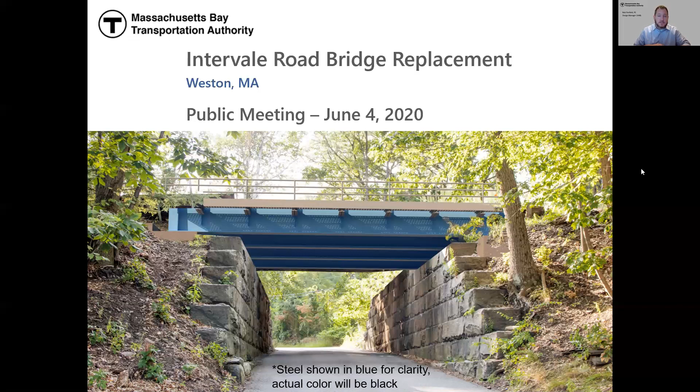Meeting with you today, as John mentioned, is the MBTA project manager Gary Orlando, who is the project manager with Barletta, myself, the design manager on the project, and Andrew Burkholder, who is our senior engineer on the project. Next slide.

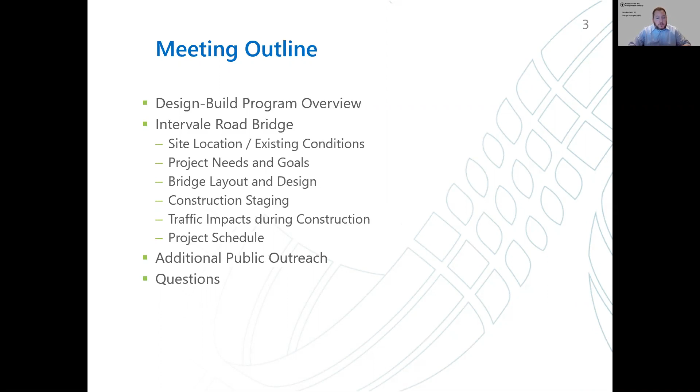As John indicated, the outline for today's meeting is as follows. We're going to discuss how this project fits into a larger design build program that the MBTA is delivering. Then we'll focus on the Intervale Road project itself, discussing its site location and some existing conditions, the project need and goals, the proposed bridge layout and design and detailing. Then we'll walk through the construction stages we'll use to build the bridge, and how traffic would be impacted during those phases. I'll highlight the schedule of the project and identify other opportunities for future public outreach, and then we'll move into the question and answer session. Next slide.

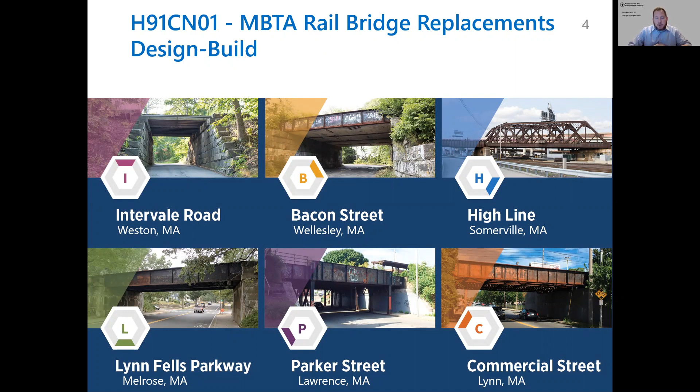As we've mentioned, this particular project, the Intervale Road Bridge replacement, is part of a larger program. It's a design build program that involves the replacement of 6 different bridges, all located at various spots along the MBTA's commuter rail system. Next slide.

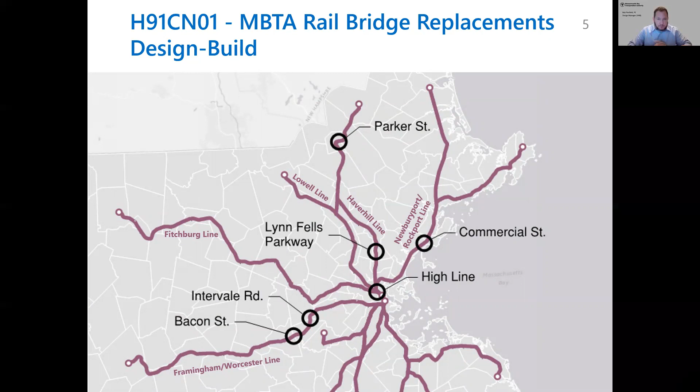To give you an idea of how this program came about, it started back in 2016 with the preliminary design of each one of those 6 bridges. In 2017, the MBTA's Capital Delivery Department sought to accelerate the pace of their projects and decided to combine 6 individual projects into one large program, using design build as the method to accelerate that program and encourage more innovation. From 2018 to 2019, there was the procurement for that contract, and 9 teams had proposed on it, 3 were shortlisted, and ultimately the Barletta VHB team was selected as the best value.

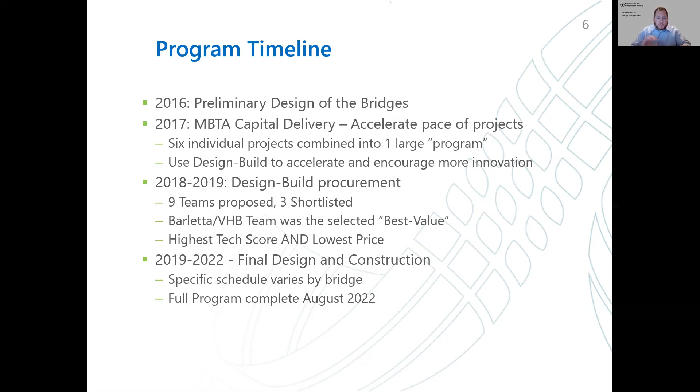The program itself will run from 2019 to 2022. While the specific schedule will vary for each bridge, the full program will be complete by August of 2022. As we get farther into the slides, we're going to talk about what the schedule is for the Intervale Road Bridge specifically. Next slide.

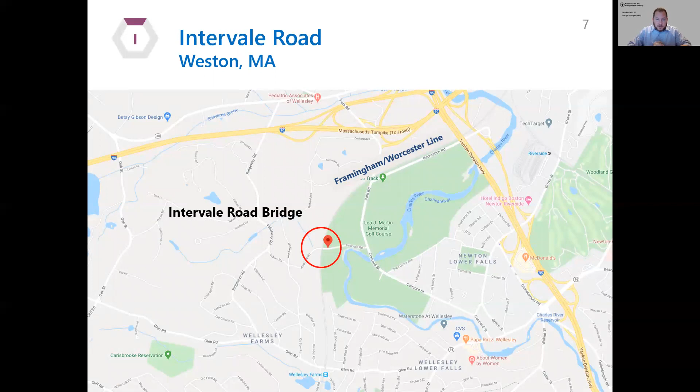So just to get an idea of where we are in space, here's a map showing the Intervale Road Bridge and its location. It's just to the west of the Leo J. Martin Memorial Golf Course. It is the Framingham-Worcester line over Intervale Road. Next slide. And here we're going to zoom in so you can see where it is in space and some of the surrounding areas.

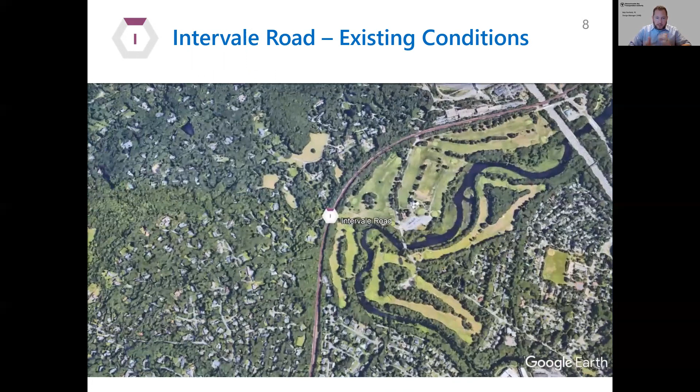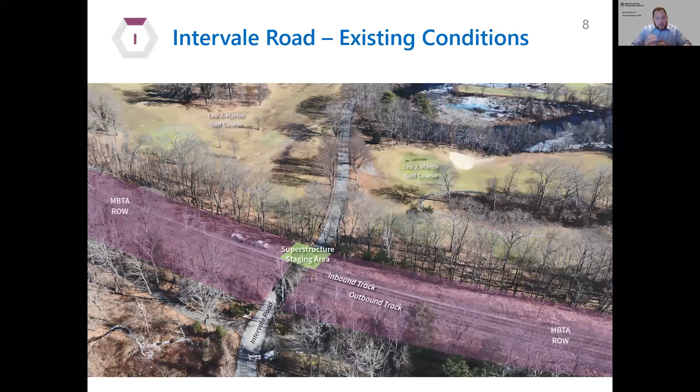Here on this slide you can see the existing bridge, which carries the inbound and outbound tracks of the Framingham-Worcester line. This corridor once carried 4 tracks, so there are 2 portions of the bridge that no longer carry tracks. You can see the MBTA right-of-way shaded there, and the green rectangle noted as the superstructure staging area, where we'll construct the new bridge before moving it into place - we'll highlight that later.

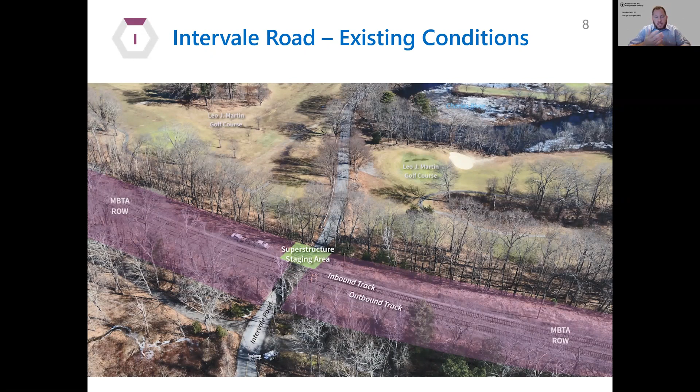Utilities in the area consist of signal and fiber optic lines carried by the bridge, and there's also the PTC, or positive train control, located on overhead wires along this corridor. This bridge sees 52 commuter rail trains on any weekday and 18 commuter trains on each day of the weekend. It also sees periodic Amtrak and CSX freight traffic.

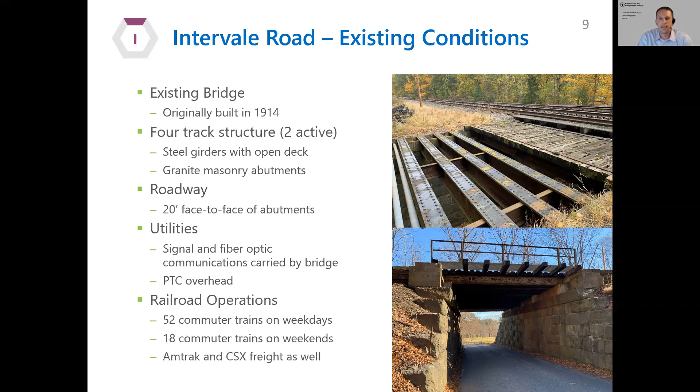So why does this bridge need to be replaced? Basically, the existing structure is in poor condition. We typically rate bridges after they're inspected on a scale of 1 to 10, with 10 being great condition and 1 being basically out of service. Any rating of a 7 or 8 is a good rating.

A 5 or a 6 we would consider that structure to be in fair condition, and below that, a 4 or 3, that's poor condition. This structure is rated in poor condition, and to continue the MBTA's goal to provide a safe and efficient transportation system for the T riders and the public, and to maintain its state of good repair, the structure is in need of replacement.

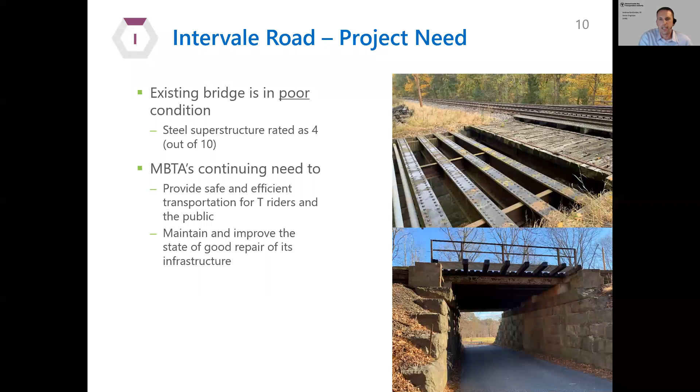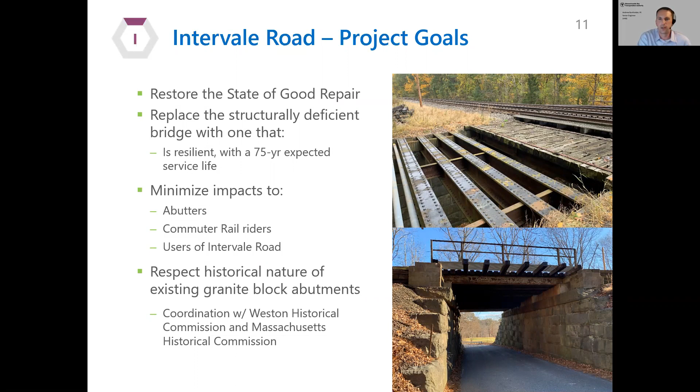Our project goals: we want to restore that state of good repair for the commuter rail system, replacing this aging structure with one that is resilient and would provide a 75-year expected service life. We want to do that while minimizing impacts to the abutters, the commuter rail riders, and users of Intervale Road, and we'll respect the historical nature of the existing granite block abutments through coordination with the Weston Historical Commission and the Mass Historical Commission.

Getting into the new bridge design, it will be a complete bridge replacement - a completely new structure. The track alignment and profile through here will remain the same, meaning we're not going to raise the tracks, lower the tracks, or change their alignment. They're going to be in generally the same spot as they are now.

We are going to use accelerated construction techniques, an acronym of ABC, or accelerated bridge construction, throughout the project to reduce impacts to the abutters, the users of Intervale Road, and the T riders. This design does allow for a future third track through this corridor - the new bridge will have room for 3 tracks, but only 2 tracks will be replaced at the end of this project. It's a brand new single span structure, and we will be building the new abutments behind the existing ones in order to retain those granite block abutments. All construction will be within the MBTA right-of-way.

The graphic at the bottom of the screen represents a section view. If you were able to stand on Intervale Road and slice the bridge and ground right down the center line, this is what you might see. The brownish color is the existing granite abutments, and you can see the new bridge, which consists of micropiles as the foundation, precast concrete abutment caps with concrete approach slabs, and the steel superstructure shown there in blue.

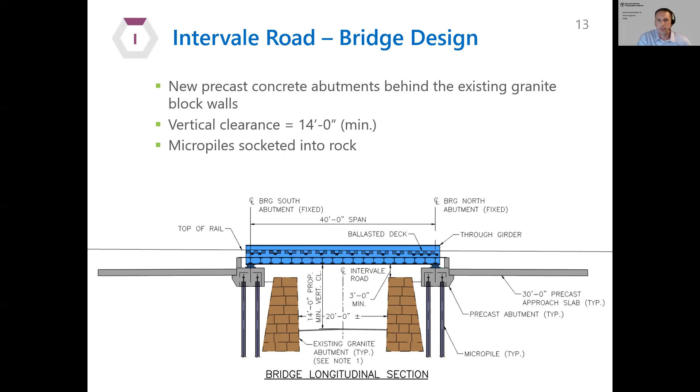When most people hear piles, they think of a big pile driving machine, a big hammer, a lot of noise and vibration. These are much different - a type of pile that's drilled into place using relatively small equipment. It sits up on the track level and drills these piles down into the bedrock with very minimal noise and vibration. The vertical clearance here in the final condition will be 14 feet from Intervale Road to the bottom of the structure.

This bridge will support, or can support, 3 tracks in a future condition, but only 2 tracks are going to be installed with this project, and those are the existing tracks that are out there today. It will have safety walks on both sides of the bridge.

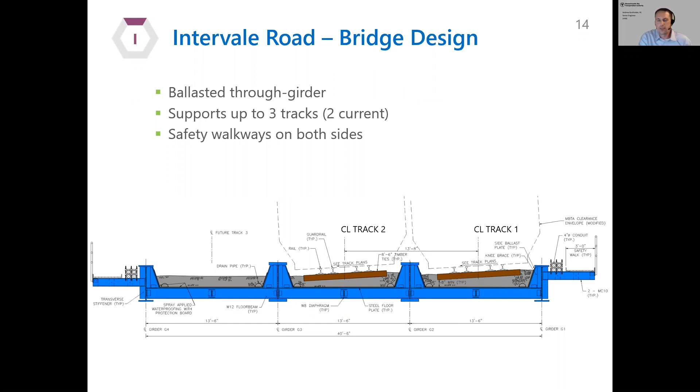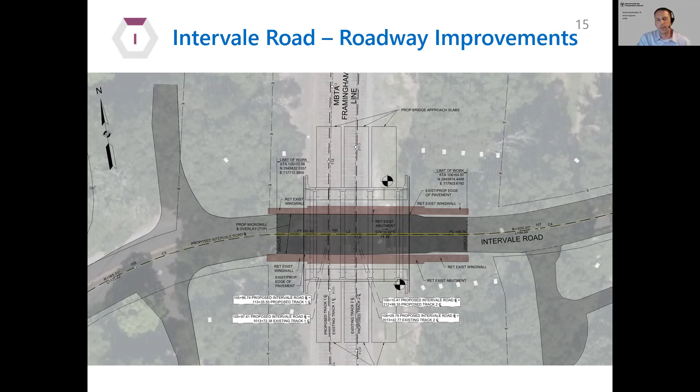As far as roadway improvements, I wanted to highlight these. This is a view looking down on the bridge with Intervale Road running left to right across the slide. You can see the darkened area in the vicinity of the bridge. This is the area that will receive new pavement and new striping at the end of the project. It basically covers the limits of where those granite abutments are today.

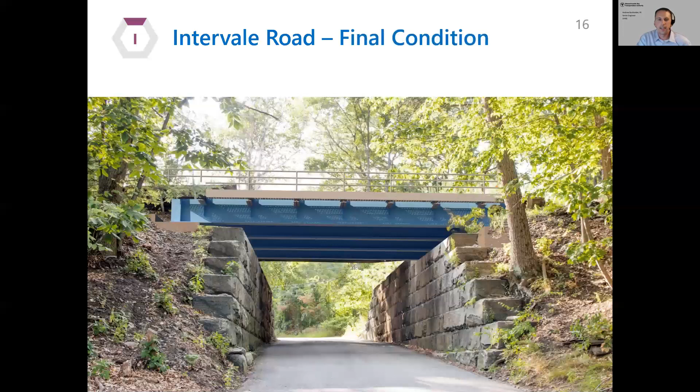So again, this is what you saw on the first slide to begin the meeting, showing what that bridge would most likely look like in the final condition. But again, the pavement in this area would all be new.

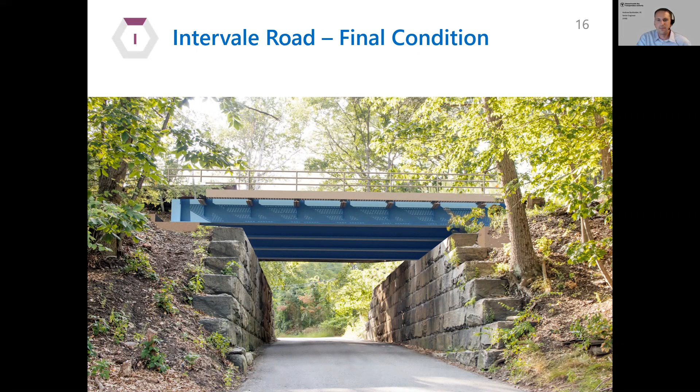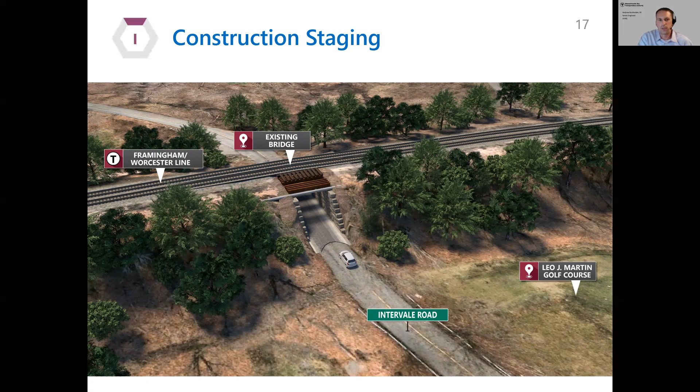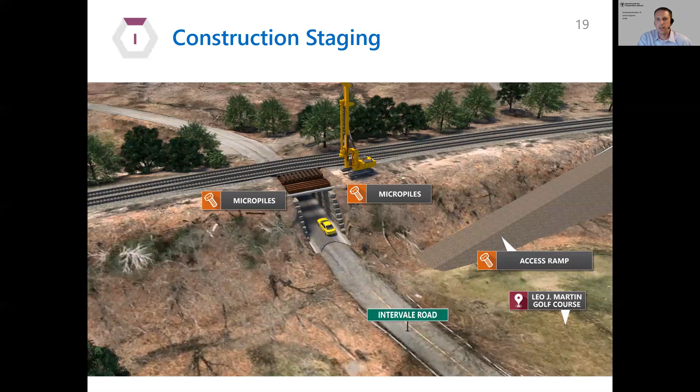The next step in construction is to remove, actually demolish, those abandoned bays of the existing bridge. As I mentioned, it used to be a 4-track bridge. We need to remove portions of the existing bridge to provide space to assemble the new superstructure next to the existing one. In order to do this, we will need to close Intervale Road to vehicular traffic.

This is for 2 reasons. One is general space and access for the equipment that is needed to perform these operations. It's also a safety concern. We're lifting heavy loads, overhead work. We really can't allow the general public to be in this vicinity when these types of operations are going on.

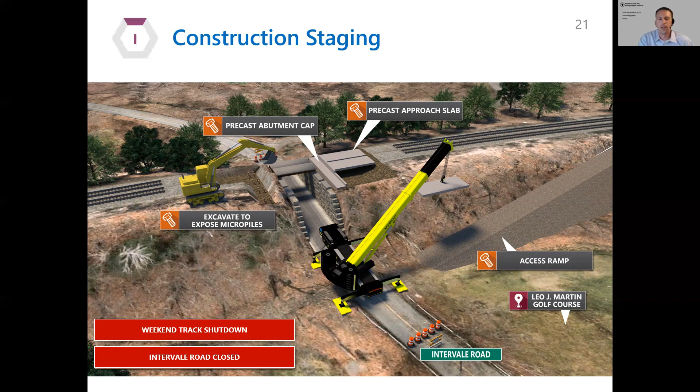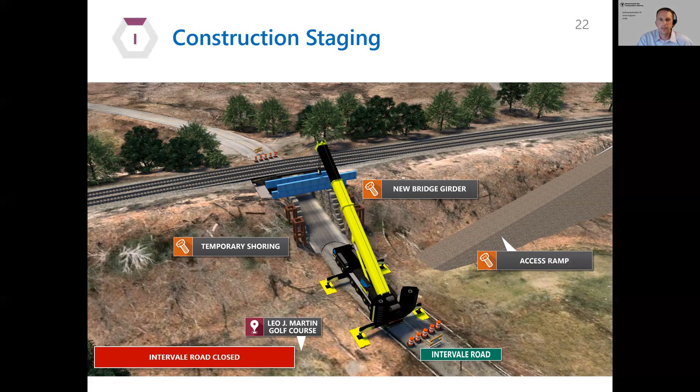Next slide, please. So this slide shows what that proposed superstructure would look like once it's complete. And then the final step would be to actually move that into its final position.

Next slide. So again, a weekend track shutdown, Friday evening to early Monday morning. This allows us to demolish the remaining portions of the existing bridge and then use equipment called SPMTs, self-propelled modular transporters. You can think of it as a big flatbed with lots of wheels that can move under its own power.

This machine can raise the new bridge up and essentially drive it into place, lower it down in its final location. And then by the end of the weekend, by early Monday morning, the tracks are back in place and trains are running for commuters Monday morning.

So that essentially finishes off the bridge portion. One more step we need to do here is to repave that section of Intervale Road, as I mentioned. You'll see that portion of the road is repaved and restriped, and at that point the road is reopened.

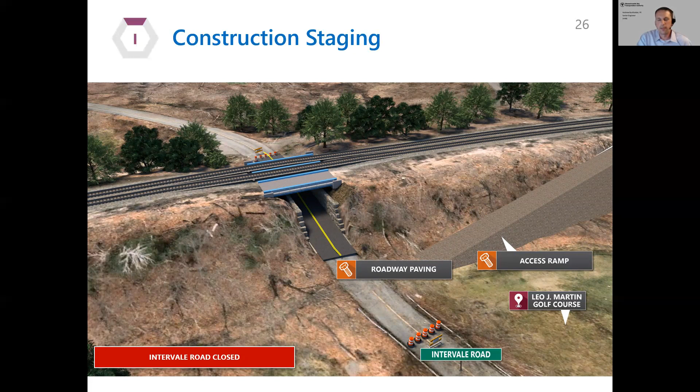Next slide. And then the site is cleaned up, access ramps removed, and the project is complete at that point.

So as you can see, we've shown a closure of Intervale Road, so we want to also give you an idea of what a potential detour might look like during that closure. I'll turn it back over to Bob and he can run through those detour routes. Thanks, Andrew. We can go next slide.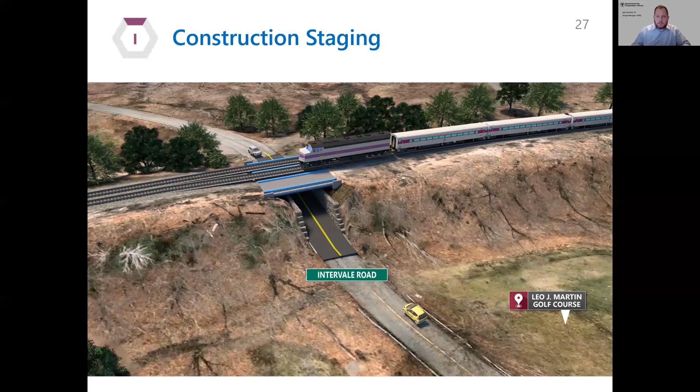As Andrew indicated and walked through the different stages of construction, one of the overarching goals of this project was to figure out a way to allow this bridge to be replaced with minimal impacts to the commuter rail system and minimal impacts to the traveling public along Intervale Road.

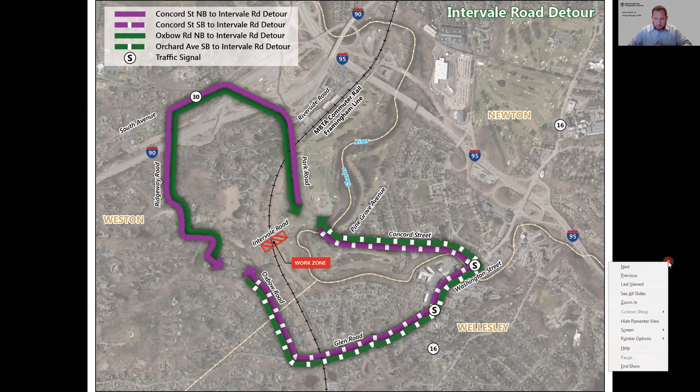I'll do the next slide, thank you. Next up, I'd like to highlight the proposed project schedule.

As some of you might be aware, the site clearing started this past fall of 2019. We're now prepping the site in spring of 2020, and we're proposing to do some of the foundation work in summer of 2020.

As you saw in Andrew's slides, the partial demo of the portions of the existing bridge that are not currently carrying tracks would be in fall of 2020. The construction of the temporary shoring towers and the new bridge would happen approximately spring of 2021. We'd be moving that new bridge into place in summer of 2021, with site cleanup concluding in the fall.

As I mentioned early in the presentation, while the full program extends until approximately August of 2022, this particular bridge and project will be complete approximately fall of 2021. Our next public meeting will be approximately late fall of 2020, to provide further updates as we continue to refine the design, detours, and schedule.

Next slide. And lastly, how you can reach us. There's a few ways. One is we have a project website that's up: mbta.com/IntervaleRoadBridge. If you go onto that website, you can add your email address, and we will provide e-blasts and other information as the project continues, if you want to stay informed that way.